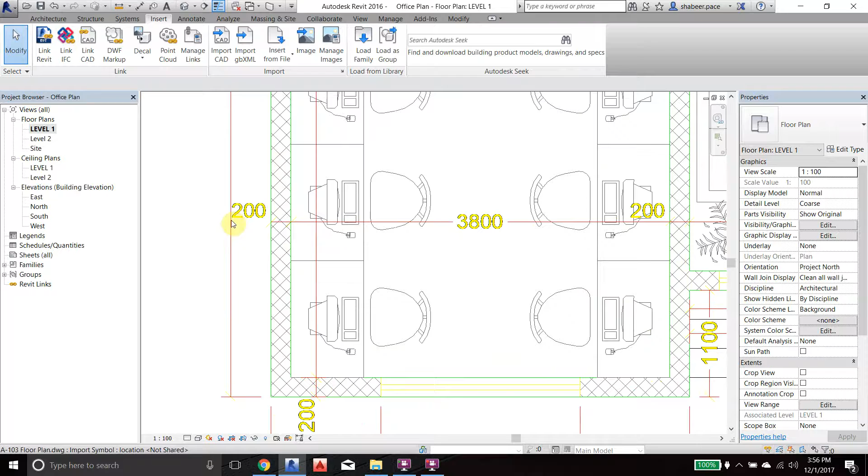Okay, so this is the imported CAD file, and first we'll start to make the exterior walls wherever it is visible, and you can see all the values will be given here. Like the wall thickness is how much? 200. Okay, right. So let us start from this point.

Now I'm going to the architecture tab, and this is my wall icon, so I can just click here and say wall architectural. And if you remember, the wall thickness is how much? 200. Okay, so what I'm going to do is here basic wall generic 200. If I click this arrow, I can see some other walls also, but basically I'm going to use this one, basic wall generic wall 200, because I want to be very simple for our project, but you can use any of this one. I can say 200, and this is important, very important.

I want you to, anytime when you're making any projects or any drawings, come to this video, or at least remember this, that this information is coming when you're going to select the wall. See, I click modify, everything is gone. When I'm going to the wall, as soon as I select the wall, this information will appear.

Not everything you can apply, but like say height, and say what is here now, unconnected. Unconnected means the height is not connected, but where our wall should go and connect. So we'll go and click here and level 2, right? So you see automatically it will be closed. It is closed at 8,000, but it will be 4,000.

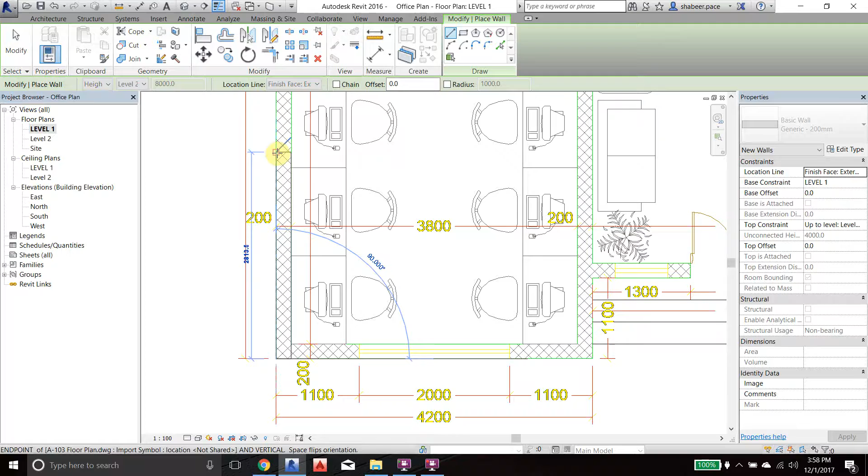So here I think the better easy way will be, I will go to say, okay, finish face exterior. Now you see I'm just going to click on this wall, and you see it's nice. I'm going to draw this wall here, continue. Okay, stop. It's very easy. This is the advantage of the CAD, that if you do something in the CAD, it's better.

In the Revit, you're not going to think a lot about the drawing. You will take some time in the CAD, but as soon as you bring it to the Revit, it will be more advantageous. So just click and say okay, fine.

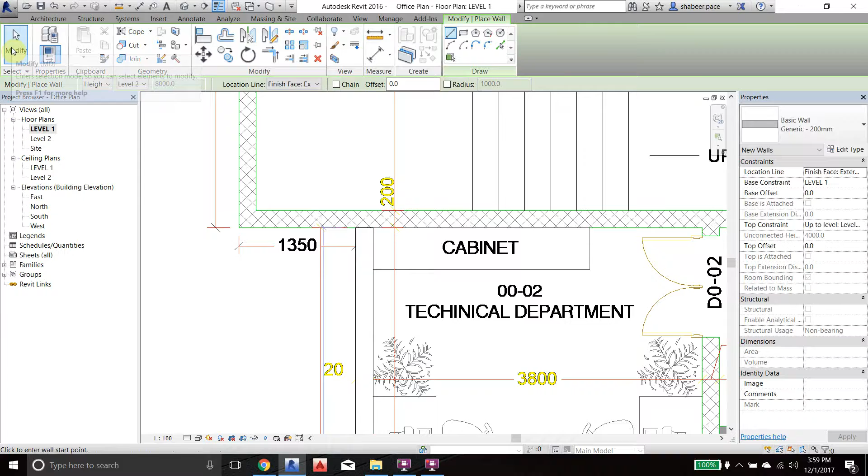Now you'll come back to the wall again, an architecture wall. Let's say I'm going to start from here, go straight. Door, forget about the door now, the opening of the door, anything, forget about it. The Revit will make it by itself. You're just going to make the walls now.

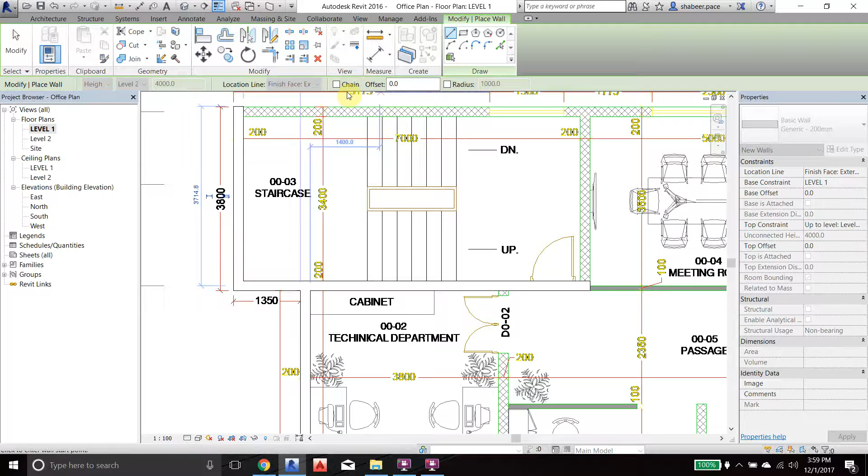So you're just going to connect it here. Very nice. Continue. Very good. Continue. Nice. Continue. Nice. Okay, and then continue from here. Perfect. This one we are not going to make. Why? This will be made later on, because this is a partition.

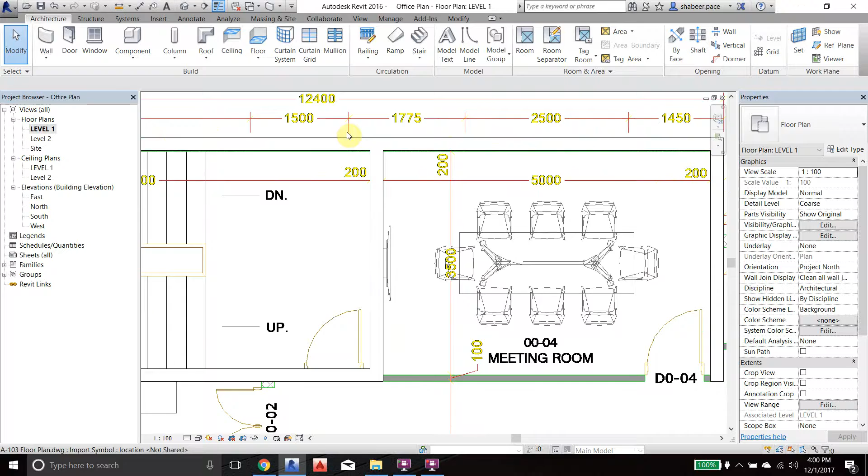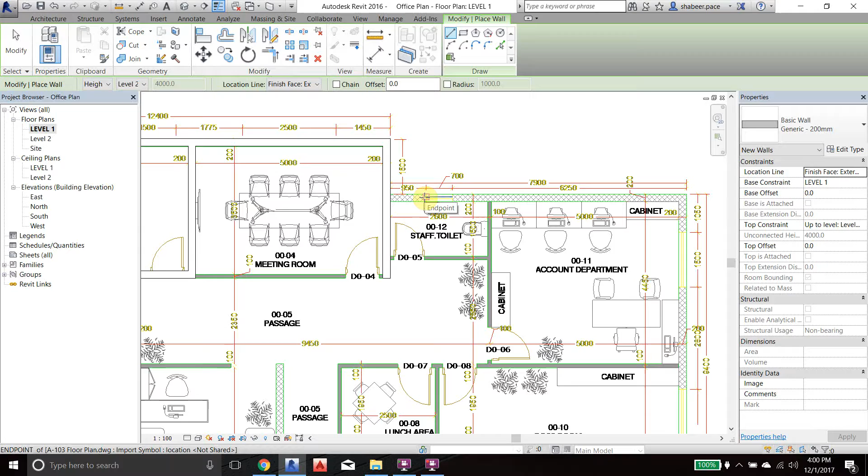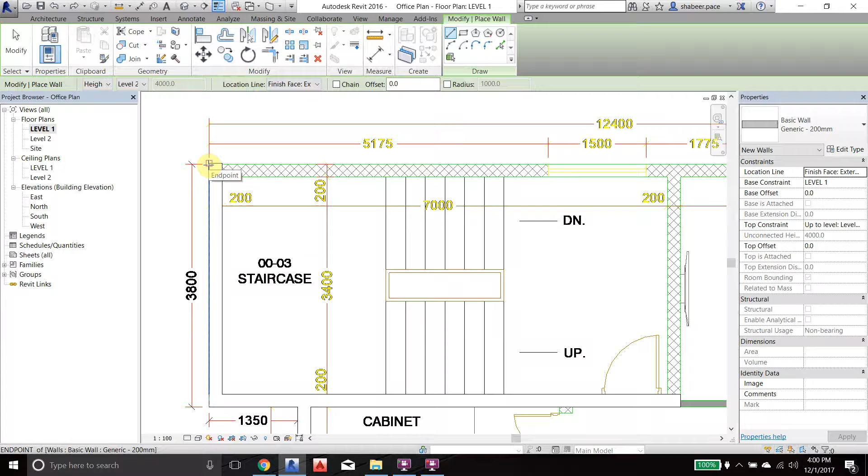I have a question, like where you ended the wall, right? You started from the top, not from here. So that's not an issue for you, understand? Like you made that wall, okay, and you stopped over there, and you're supposed to start from the end part. Like here, this is where you are supposed to start, but you started from the other corner. No problem. That's why we choose exterior corner, we already chose exterior. No, you're not, no problem. I'm going to Control Z, Control Z. Okay, go where you started from. Here? How did you start the second one from there? Yeah, from that corner. Not a problem, it will automatically join itself and cut by itself.

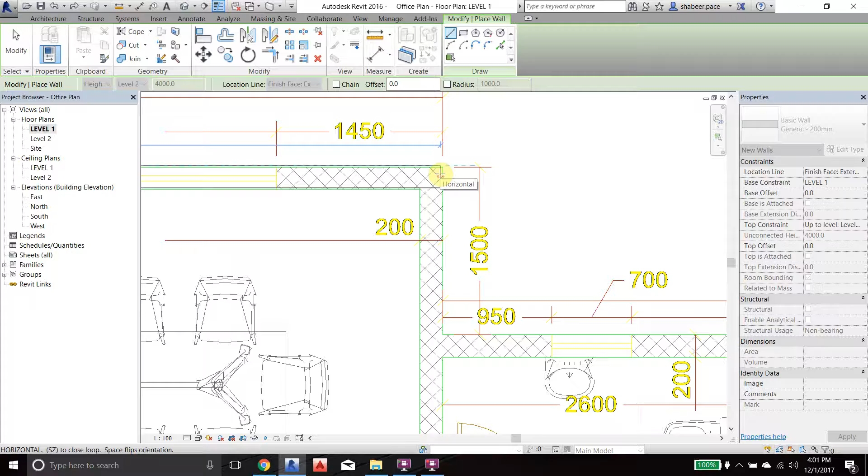What is the shortcut to get back to, for getting it back? Control Z? No, no, ZE, just said. So here is something in selection, this is not available. Yeah, that's what I was also saying. Because the wall, you see, sometimes this may happen. So just select the wall and drag it down. Okay, right, and again the wall. See, you can choose from here or here. It's fine, right? Anyway.

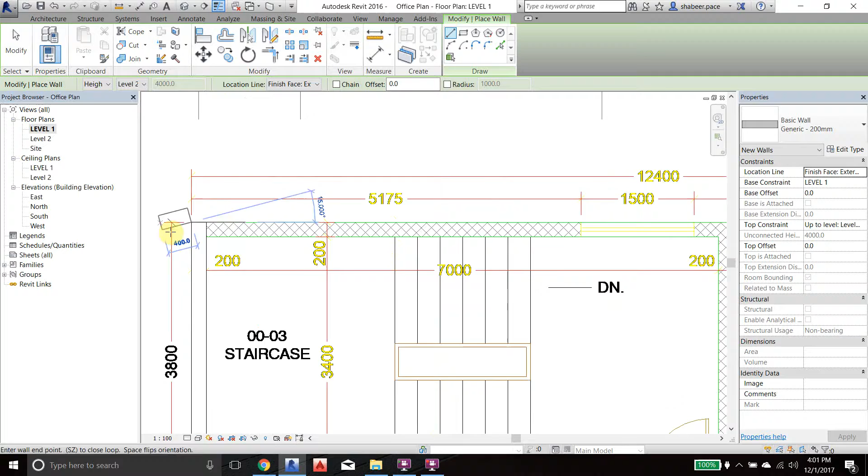Okay, again the wall. But it's better to try to avoid the overlap. It's always better, maybe that will cause a problem in the splitting phase. Yeah, that's what my question is, maybe it will cause the problem.

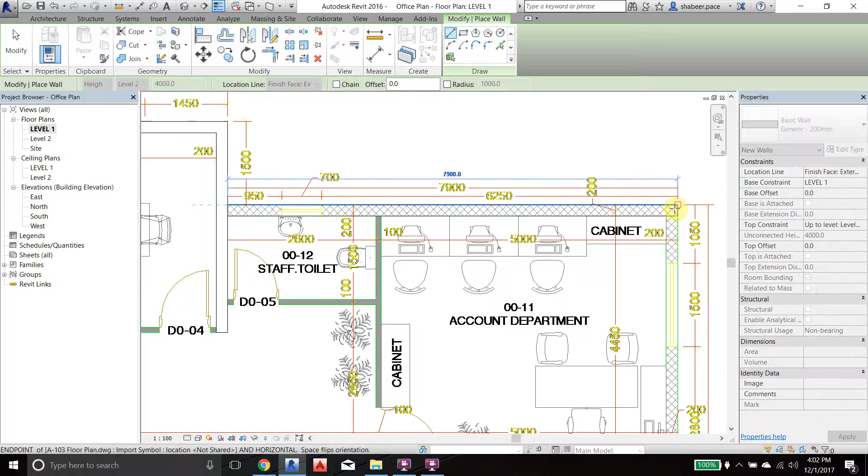Okay good, it's nothing, see it's very easy. It's like sketching for a kid drawing. The only thing is you should know properly how you're going to do it.

Just a normal wall, huh? Better than a raster image, yes. Better than a raster image, yes. Better than an image. Yeah, better than an image, okay.

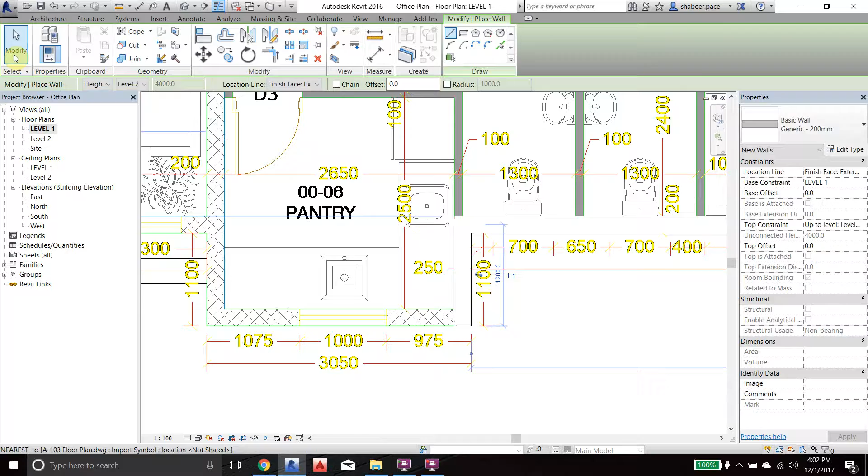Anyway, once you complete these walls, the next thing is to create a 3D view and rename it. So I'm just going to click on default 3D view. From time to time in Revit, when you're making something, you should always check in the 3D also. Okay, so I'm going to 3D. Yeah, this is my 3D, it looks nice. Let me keep the same 3D also.

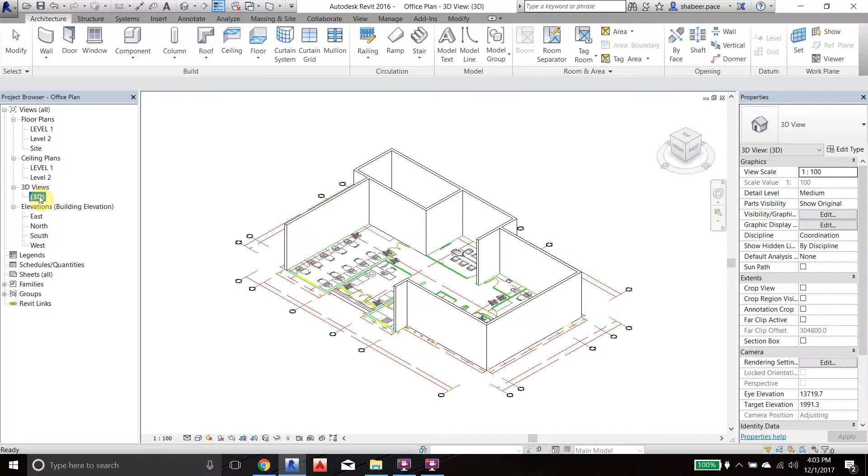If you want to rename it, you can go and rename it. But right now let us keep it as 3D, and you can keep it to realistic. Okay, but one important question here, that will be the new thing which you are going to learn now. Maybe I showed you before, but it's an important thing.

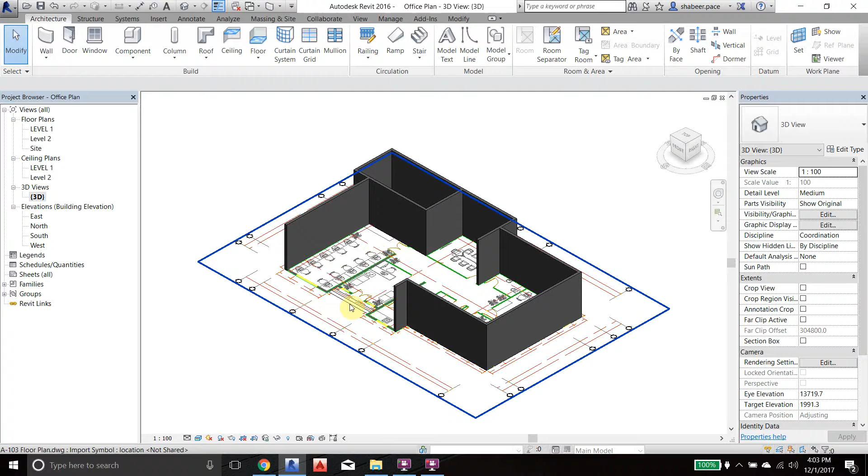Now, you can see here the 3D walls are drawn on the AutoCAD, but I don't want to see this AutoCAD drawing here. Does anybody remember how to hide this AutoCAD drawing in this 3D view?

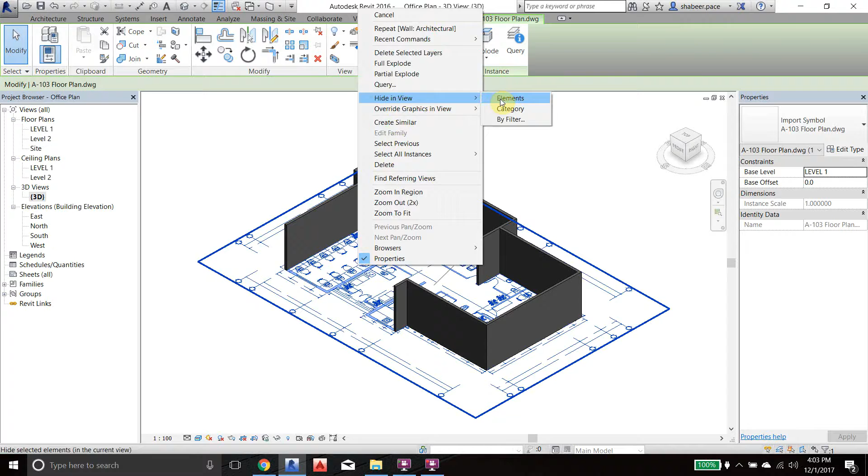Yes, in the parameters, there are parameters. Hide by element or by type? No, I don't want to hide by this type. Another way - right click. One way, let's say right click, hide by element or category, okay. Second way, select it, right click, and hide by element. Okay, it's okay, but there is one more way.

You should know this way also. There is a view tab, because this is very important in this second part of Revit. I want to concentrate a lot on view visibility graphics. In the last session we did not cover visibility graphics a lot, but here we'll be talking a lot about visibility graphics. Okay, so I'm going to click on visibility graphics.

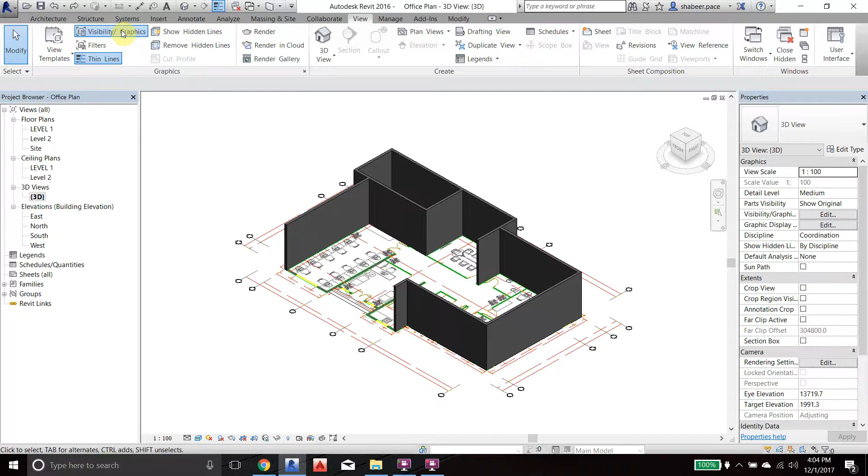In the visibility graphics I have something called imported categories. Imported categories means whatever you imported from outside of Revit. So you see here our AutoCAD drawing, A103 floor plan dot DWG. Yeah, but it was not in detail maybe. So I'm just going to click it, uncheck, say apply, and say okay, fine.

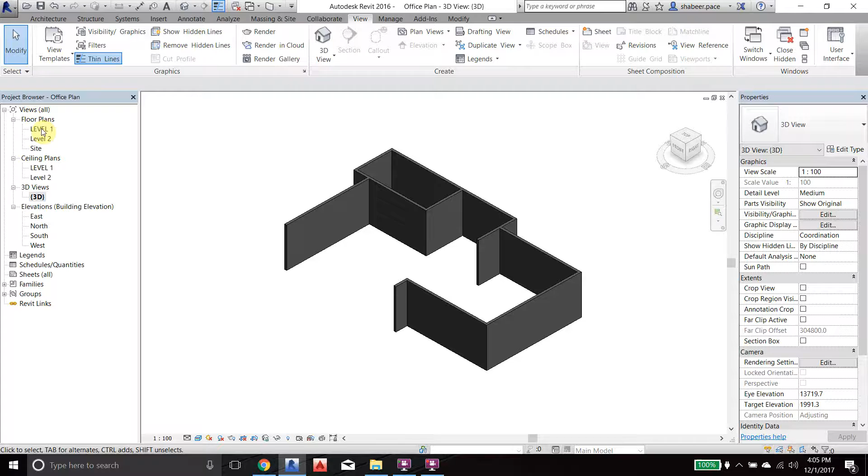Because I don't want to see this in the 3D. Okay, now my question is, if I turn off this AutoCAD drawing in the 3D, is it going to appear in the level drawing or no? In level 1, it will be there. Yeah, why? Because you just closed it in 3D, not in this other view.

But why? In Revit especially, okay, any changes you make, like in plans it will go in plan, in ceiling it will go in ceiling. Yeah, that's correct. In Revit there is one characteristic that is called - you have to remember this, and it's important. It can be an important interview question if you're working somewhere.

That is view specific. View specific means Revit is something - there are some things in Revit that are confined to the view itself. I mean, if I make some changes in this view, this will not affect the other view. Like if I'm doing something in 3D, turning it off and on, it is not going to affect the plan. If I turn off something in the plan, it is not going to affect the 3D. Okay, so that is called view specific.

Okay, and now I just want to confirm myself that the walls are drawn to exactly the correct height. What is the best way to do this? Elevation, elevation.

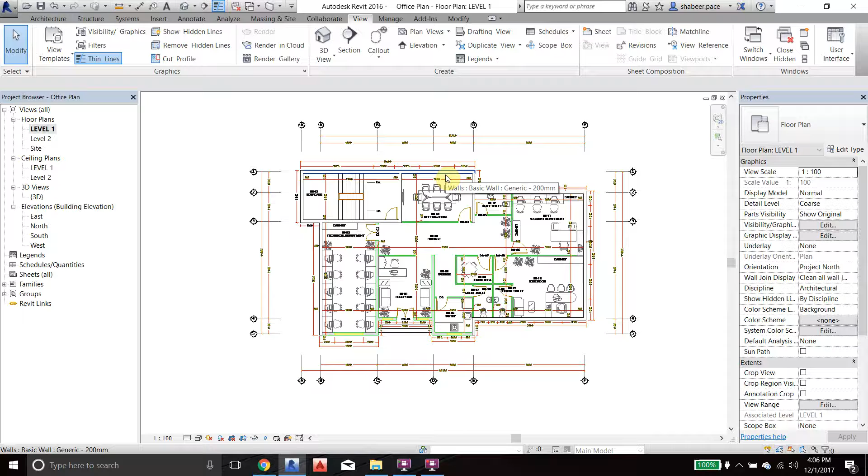You must go to the elevation and see the walls. Let's say shaded, you see these walls are connected to level 2. If by chance any wall is going up, that means this wall is not correct, so you have to go and correct it.

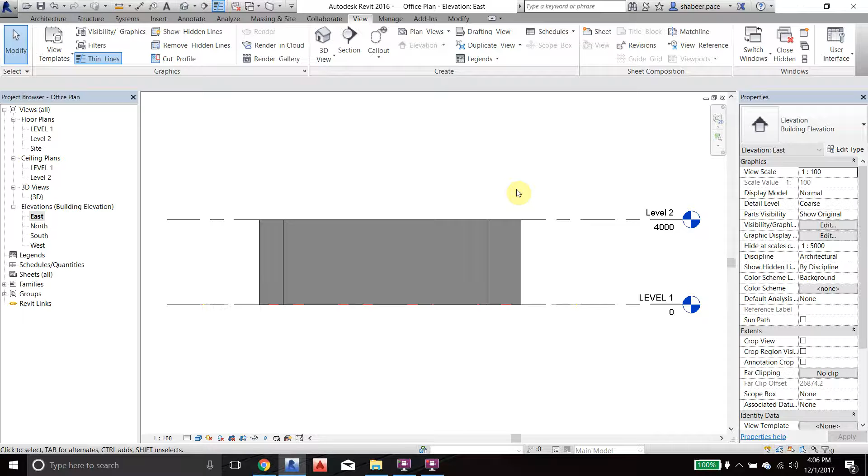In the beginning stages when you're making a drawing, draw the walls, go to 3D, go to the elevation, check your walls are properly done or not, maybe 2-3 times during your project. Then come back to level 1 and continue to draw the walls. This is the first step.

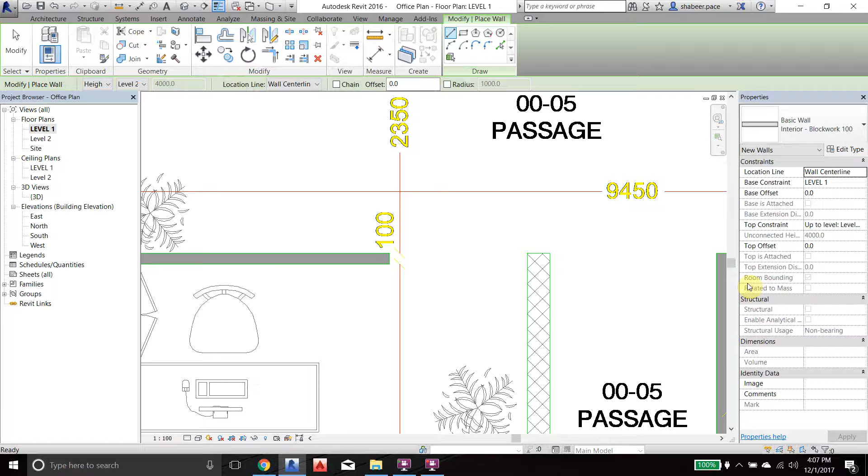The next step is, after all your external walls are drawn, you switch to interior partitions. Go back to wall again, architecture wall, and click interior block work 100. How do you know to use 100? Just zoom in here, it's 100.

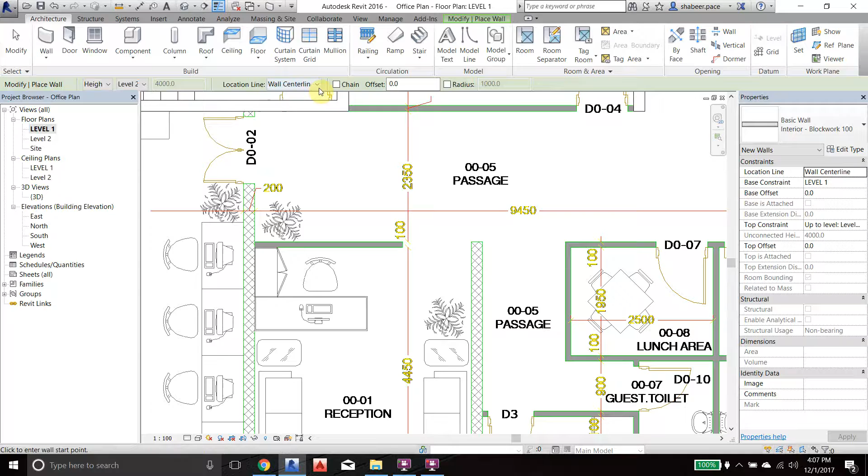So interior block work 100, and then draw it the same way. Now you have to make the adjustment from here, something like this - this is the center line, make it finish face exterior and then start to draw it. But don't keep any openings now. Finish face exterior, I just click here. See, draw it continuously, full.

Don't think about the openings when you're making the drawing in Revit. Openings you will make later on. Draw it continuously and then you will refer to the CAD drawing again and make the openings. This is easy, this is simple.

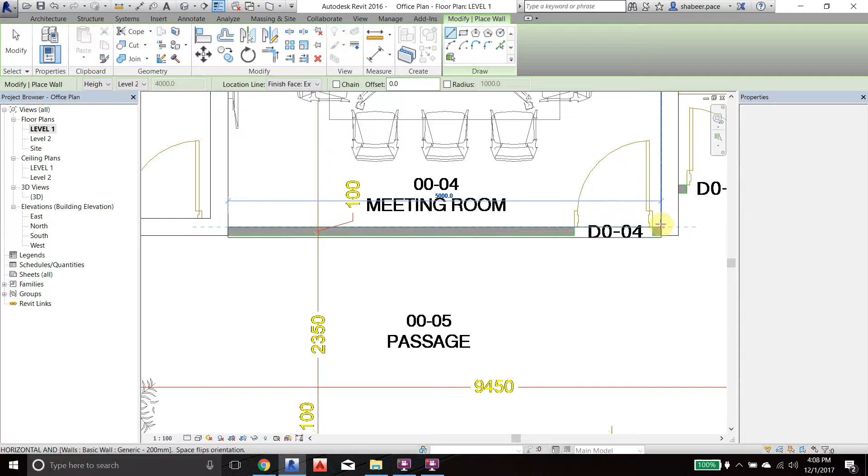You will go for the wall and just draw it directly. I guess there is some discrepancy in the wall, maybe you can try to work on this and correct it. Let me confirm once.

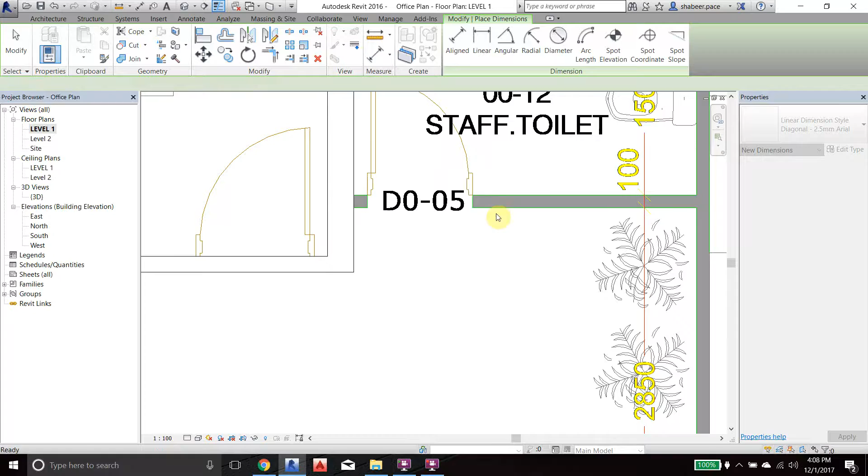I will just go here, annotate and align. It's 100. Because you see when I'm trying to draw this wall, it is extra, right? If you can see, it is extra. So why is there a mistake?

How can I correct this mistake? I can select this wall and go to edit type, then go inside edit. It's how much - 100 and 12 and 12 total, how much? 124, right? You see this is concrete masonry work in between, and then gypsum board finishing.

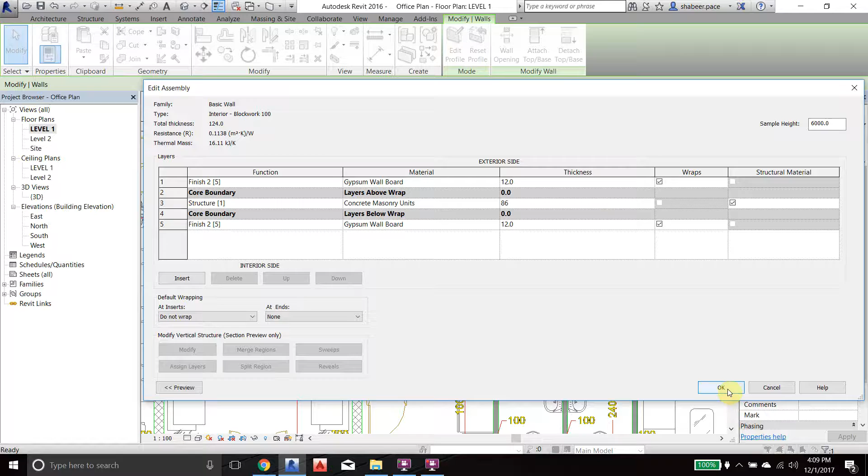So let's say we will try to reduce it. We will say 86, and then apply, and then okay. Now it's perfectly done. You can see in the shaded area it's matching perfectly. So this is the correction you have to do in your file.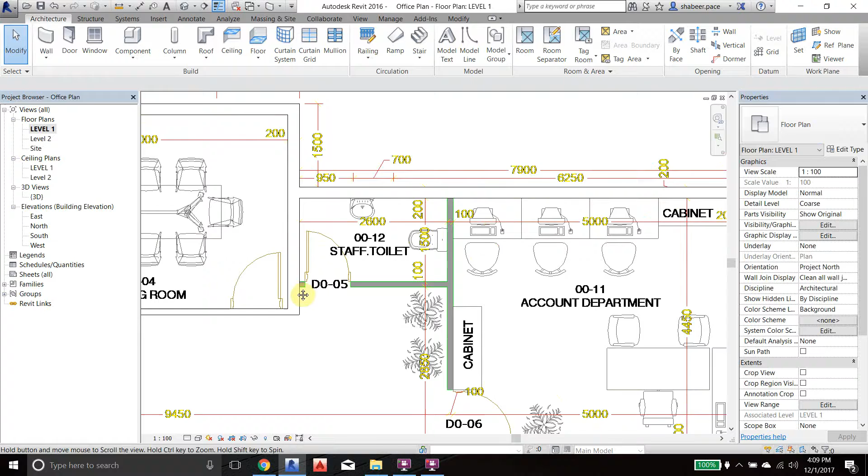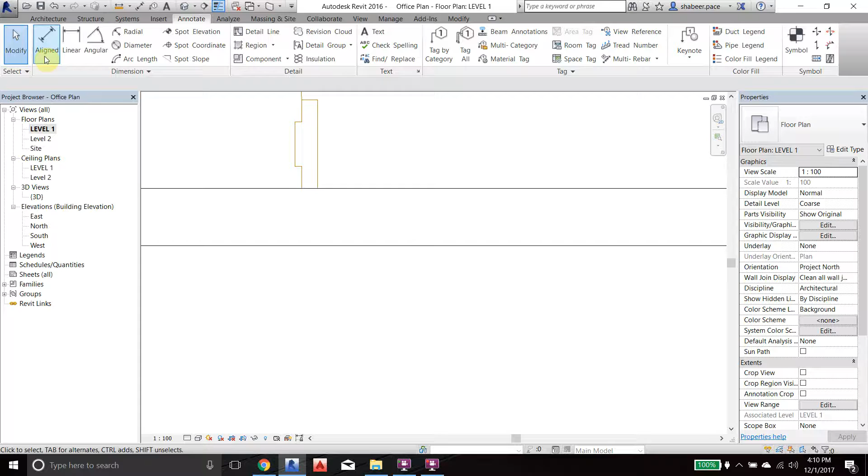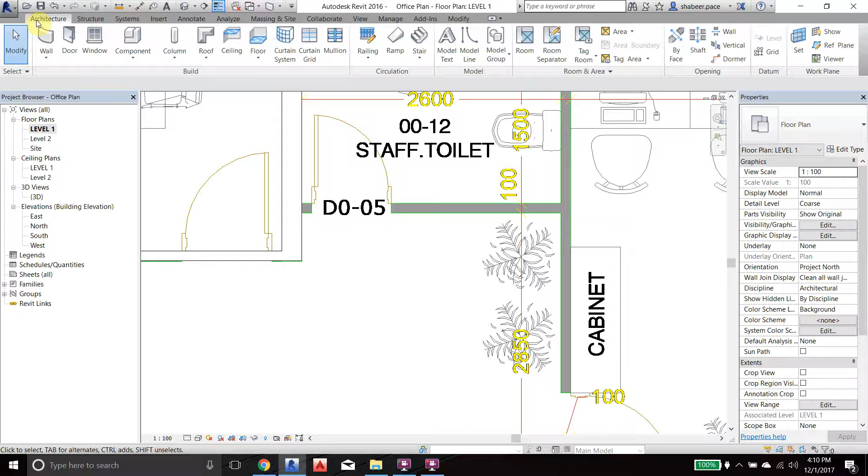Let's check once again. If I go for wall architecture... still okay. Let's check the dimension, how much is it showing - 110. Select it and go back again, edit, 76, apply. Okay, right, I'm just going to delete and again architecture tab, wall. Here I think it's perfect now.

So anytime you have any problem with the walls, just select it, go to edit type and go to the structure edit, and you can change the thickness from here. Let's say 220, 180, 190, whatever you want to do, you can go here and change it.

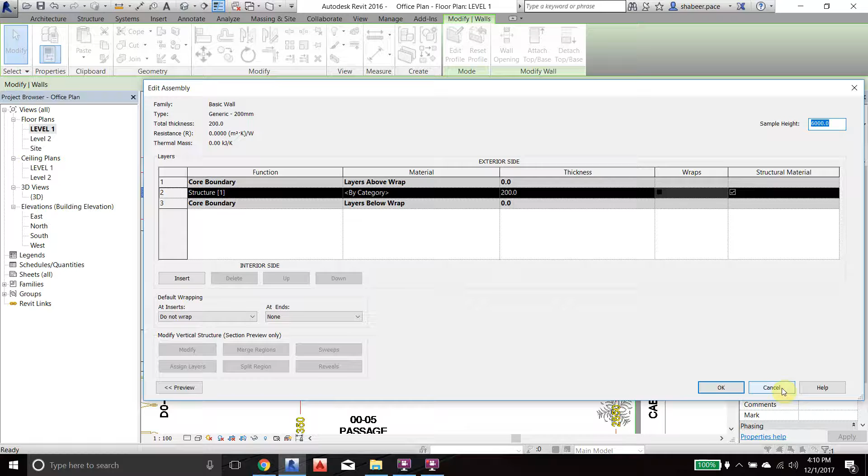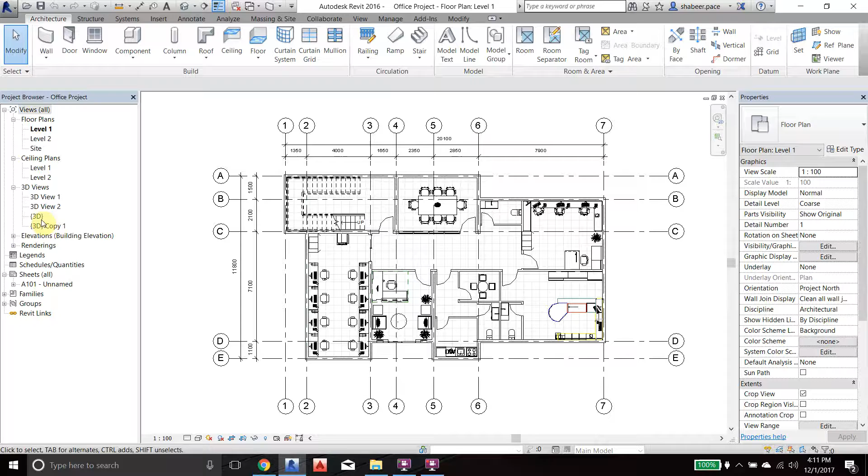So this is all about the walls. And finally, when you complete your walls, if you go to 3D, your walls will be something similar to like this. This is all the walls.

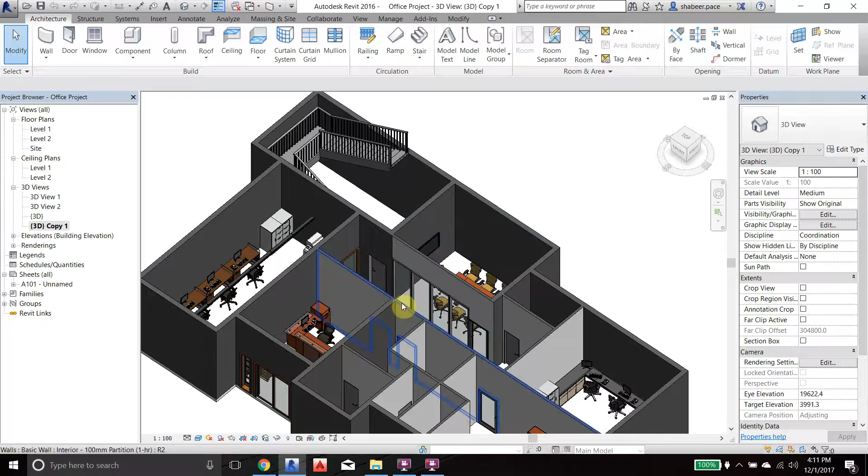When I see your plan, main stairs - we will cover the stairs. And you see the doors here, like this is what I was talking about, the side lights. And you see the partitions - that's why I was telling you about the closed partitions, because then you will provide the door here. And there is a glass wall.

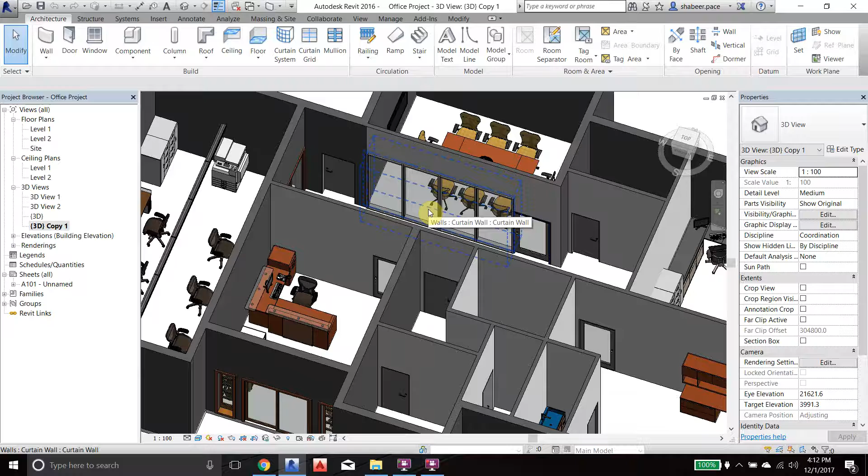Forget about all the doors, windows, glass walls for now. Take your time, relax, and the only thing is you have to do a lot of things at home. Try to concentrate and work on the walls. Ultimately the plan should look something like this. It's not very difficult, it's very easy if you sit properly and concentrate. Maybe it will take maximum 1 to 2 hours to do all the external walls and all the partitions inside.